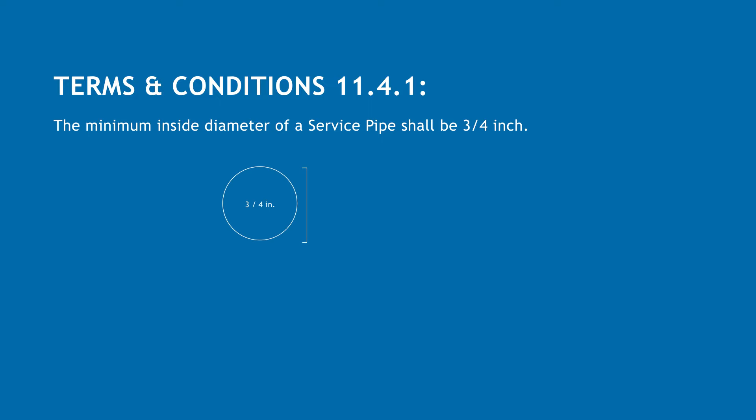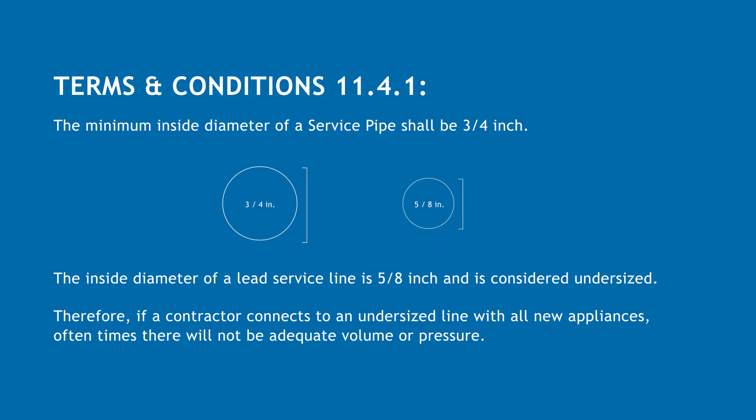The inside diameter of a lead service line is 5/8 of an inch and is considered undersized. Therefore, if a contractor connects to an undersized line with all new appliances, oftentimes there will not be adequate volume or pressure.

Let's walk through the inspection process. Contractor applies for a replace of existing service application underneath permits and forms on the Citizens Energy Group external website. New service reviews the application, then asks if the contractor is on the bonded plumbers list. If no, new service informs contractor that they have to be on the bonded plumbers list.

If yes, does the premise qualify for a ditch inspection? If no, they will inform the contractor that they need a new tap. If yes, new service will send approval to the contractor and places a note in C2M informing dispatch that the contractor is approved.

Next, the contractor calls the new service center between 8 a.m. and 4:30 p.m. when ready for inspection. The new service center creates an SDI for the same day and changes the application status to pending. The order then goes to dispatch, and dispatch will route the order to the closest USS, who will run the SDI order to inspect.

If it fails, they inform the contractor of corrections that need to be made and to call dispatch when those corrections have been completed. Contractor calls dispatch when the corrections are made. The order then goes to dispatch, and dispatch will route the order to the closest USS, who will run the SDI order to inspect.

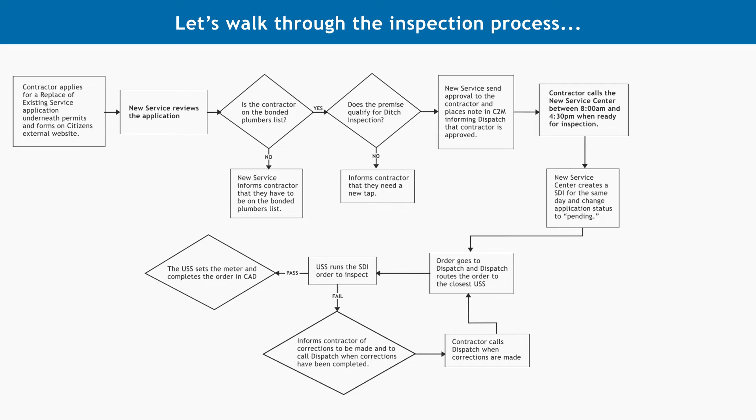Upon passing, the USS sets the meter and completes the order in CAD. The completed order goes to the new service center, and they change the status on the new application from pending to complete.

If contacting after hours, on holidays, or weekends, dispatch will check the web admin tool for approved application and create the SDI order. Dispatch will then notify new service center through email that the SDI order was completed. New service center changes status from pending to complete.

Field steps of ditch inspection. Terms and Conditions 7.1 state, all meters shall be owned, installed, removed, and maintained by the utility. The utility shall determine the kind and size of meter to be used in connection with any service pipe.

Except as provided in Terms and Conditions 7.3, all meter pits, meter pit covers, and other materials comprising the meter pit facilities shall be purchased, owned, installed, removed, and maintained in a safe manner by the customer. Terms and Conditions 7.3 state, all changes in the location of a meter shall be approved by the utility and, except as hereinafter provided, at the customer's expense.

Whenever the service pipe to a premises having an inside meter is replaced, the meter shall be relocated in a meter pit approved by the utility, located on the customer's property, adjacent to or near the public right-of-way.

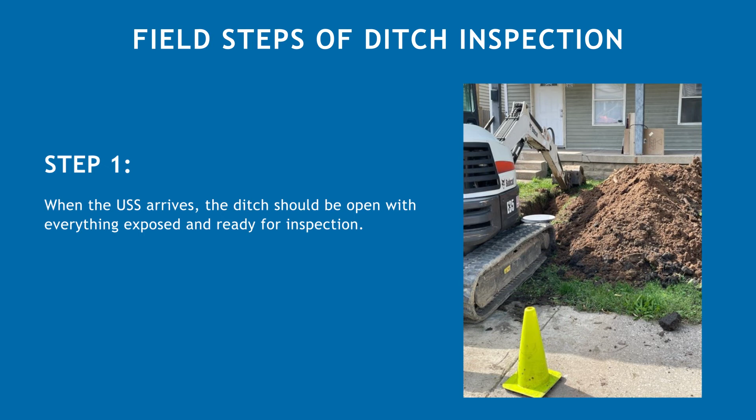Step 1. When the USS arrives, the ditch should be open with everything exposed and ready for inspection. Step 2. The USS will check to see if the pit is at grade.

Step 3. Citizens Energy Group standards state that you must use like materials. Therefore, Type K copper is the only material that will be accepted on the street side of a meter. If the material is lead, the USS will verify there is a lead to copper connection. If it is copper or other material, the USS will verify that it is the appropriate connection.

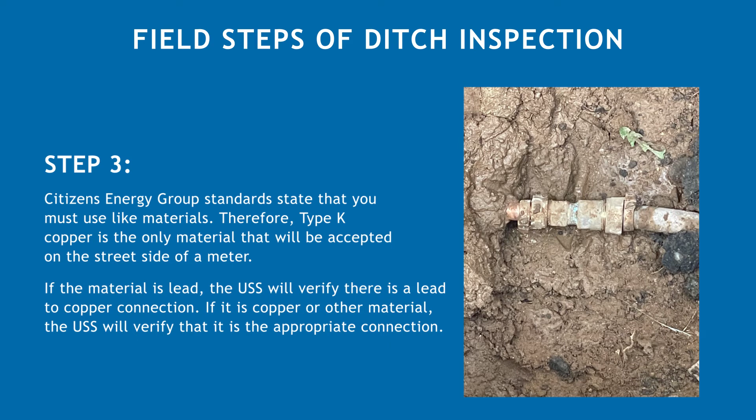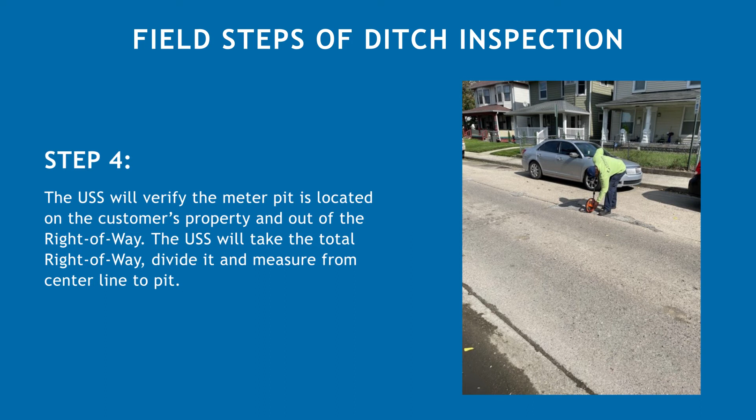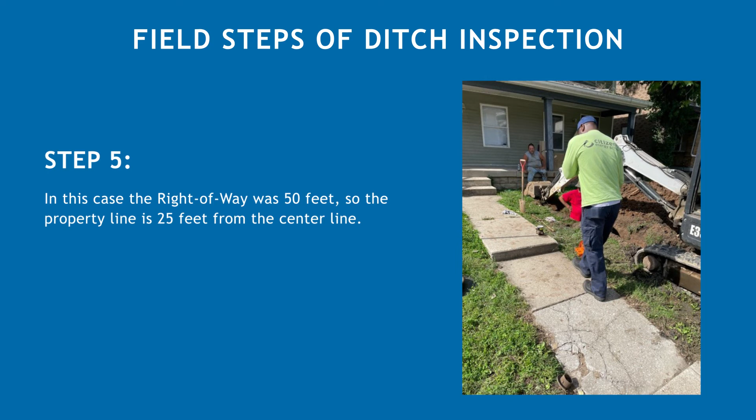Step 4. The USS will verify the meter pit is located on the customer's property and out of the right-of-way. The USS will take the total right-of-way, divide it, and measure from center line to pit. Step 5. In this case, the right-of-way was 50 feet, so the property line is 25 feet from the center line.

Terms and Conditions 11.4.2 state, the service pipe shall run in a straight line perpendicular to the main from the main to the property line. Step 6. In this case, the pit is 27 feet from the center, putting it 2 feet out of the right-of-way.

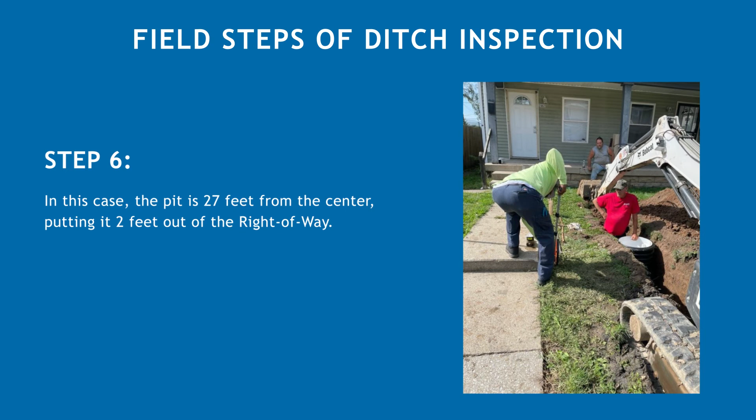Step 7. The USS will also take a measurement from pit to premise for Citizens Energy Group records. The components of a meter pit.

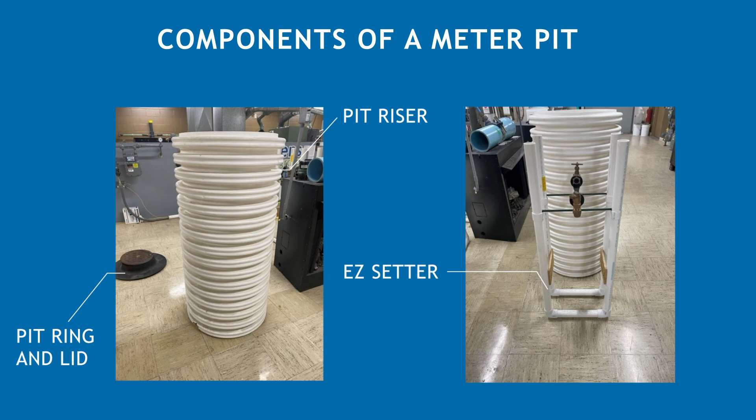Terms and Conditions 11.4.3 state, the service pipe shall be installed and maintained with a minimum cover of 4.5 feet from the main to a point where the service pipe is otherwise protected from freezing. Step 8. The USS will verify minimum coverage of service line.

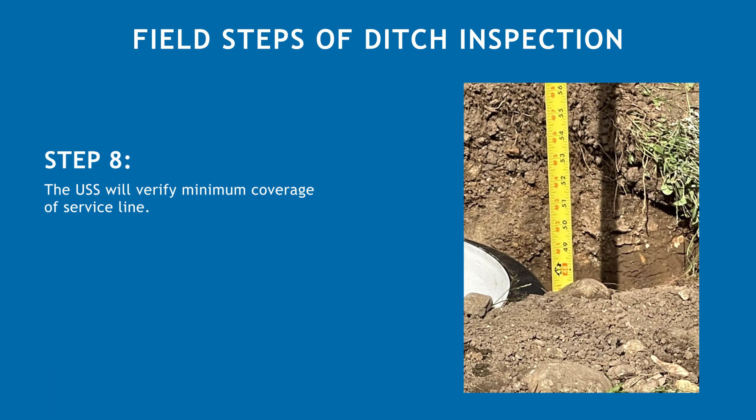Step 9. The USS will verify depth of connection to pit lid. Citizens Energy Group standards state that the depth of connection shall be 16 inches from the pit lid.

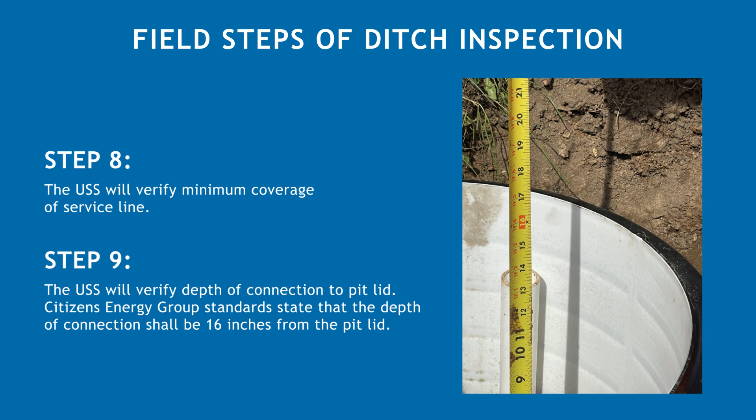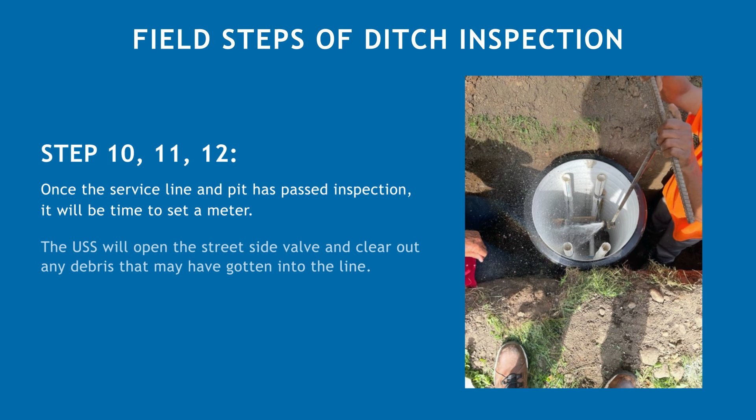Steps 10, 11, and 12. Once the service line and pit has passed inspection, it will be time to set a meter. The USS will open the street side valve and clear out any debris that may have gotten into the line. The USS will install gaskets and set a meter in the direction of the flow.

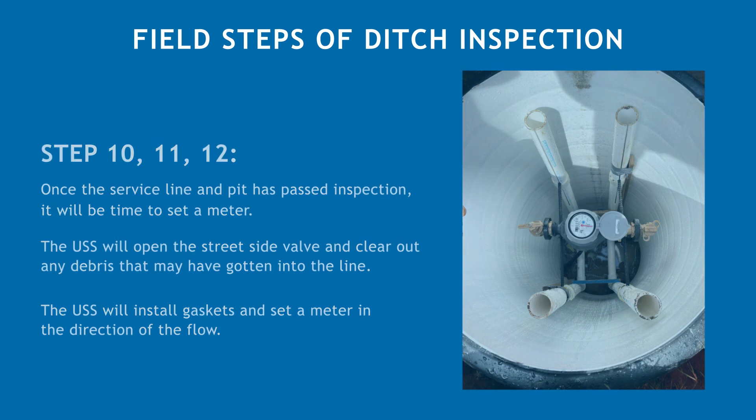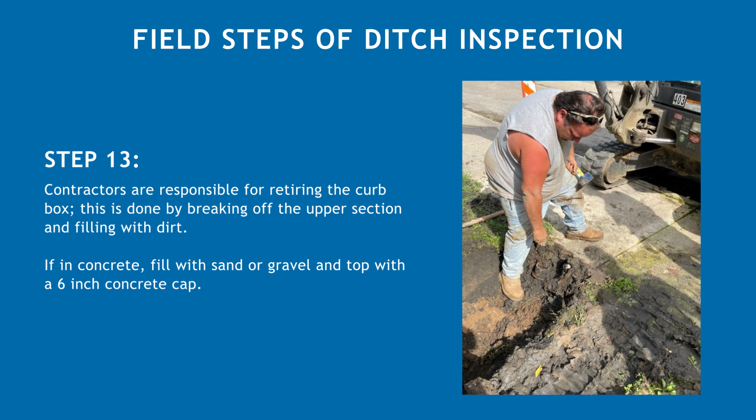Step 13. Contractors are responsible for retiring the curb box. This is done by breaking off the upper section and filling it with dirt. If it is in concrete, fill with sand or gravel and top with a 6-inch concrete cap.

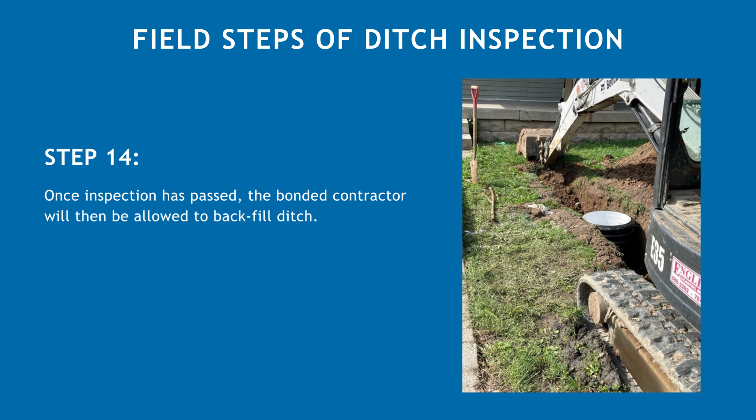Step 14. Once inspection has passed, the bonded contractor will then be allowed to backfill the ditch. Step 15. The meter pit should be left at grade or a little higher to allow for settling.

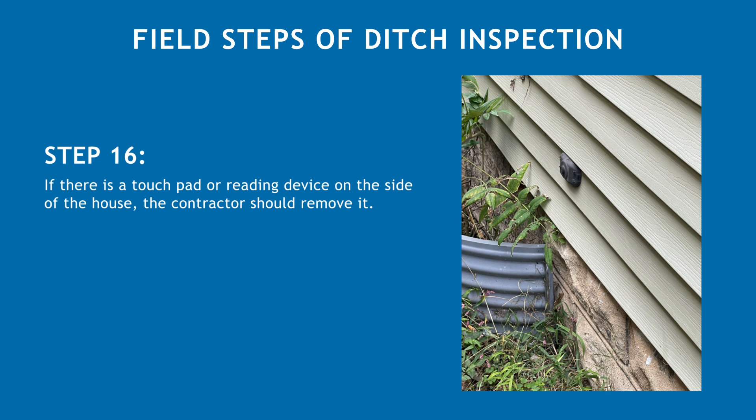Step 16. If there is a touchpad or reading device on the side of the house, the contractor should remove it. Step 17. Touchpad and old meter should be returned to the USS.